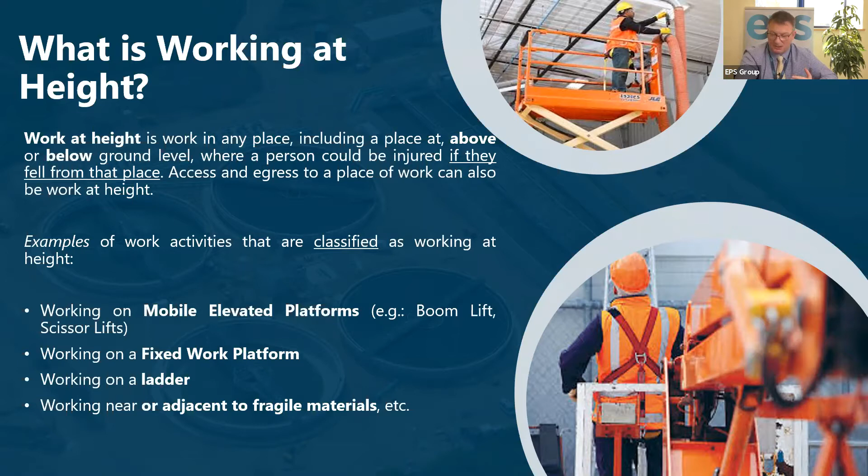Examples of work activities classified as working at height are working on mobile elevated platforms such as boom lifts or scissor lifts, working on a fixed work platform, working on a ladder, or working near or adjacent to fragile materials that could fall and break, creating another level where one didn't previously exist.

Falls are actually responsible for over 1,000 fatalities and 4,000 accidents across Europe every year. In 2019, 12 people died as a result of accidents on Irish construction sites, and 13 in the UK, with falls from height being the leading cause of fatalities. So falls shouldn't be underestimated.

I have a couple of personal experiences, not myself, but people I know who have been badly injured in what looked like relatively small falls, but they were actually very badly injured. So complacency is a constant threat, and we need to try to overcome that complacency and always be aware that working at height, or making your way to working at height, poses a risk.

Obviously ladders and step ladders are tools we use very frequently, but they should only be used where the work is of very short duration and the risk will be considered low.

The task should be light. You should be able to maintain 3 points of contact - that's 2 feet and 1 hand, or 2 hands and 1 foot, at any one time on the ladder. A handhold should be available, and the work should not involve carrying anything heavy or awkward.

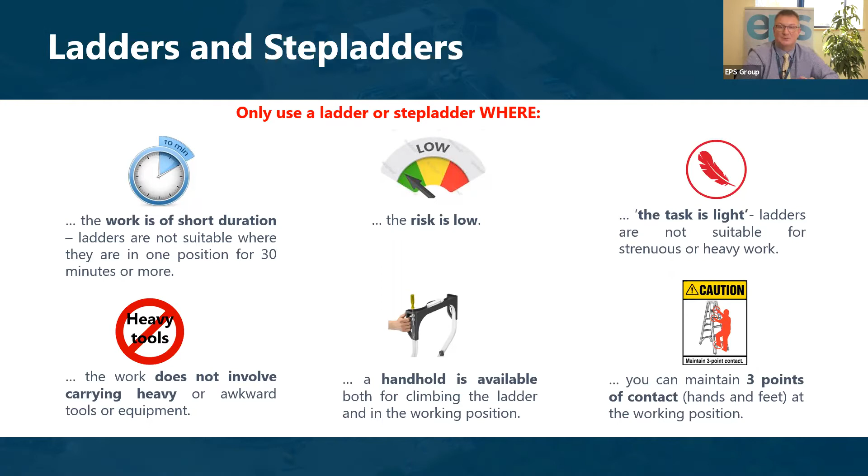Following on there with step ladders, some do's and don'ts. Ladder rules: we should always face the ladder when ascending or descending, and always maintain 3 points of contact. The top of the ladder should not be used as a step, and a ladder should never be moved, shifted, or extended while occupied.

You would have thought that was obvious, but there have been instances where that wasn't the case. We should never carry an object or load that would cause you to lose your balance. We shouldn't overreach. We shouldn't carry out work which causes sideways loading. We shouldn't work on the top 3 rungs.

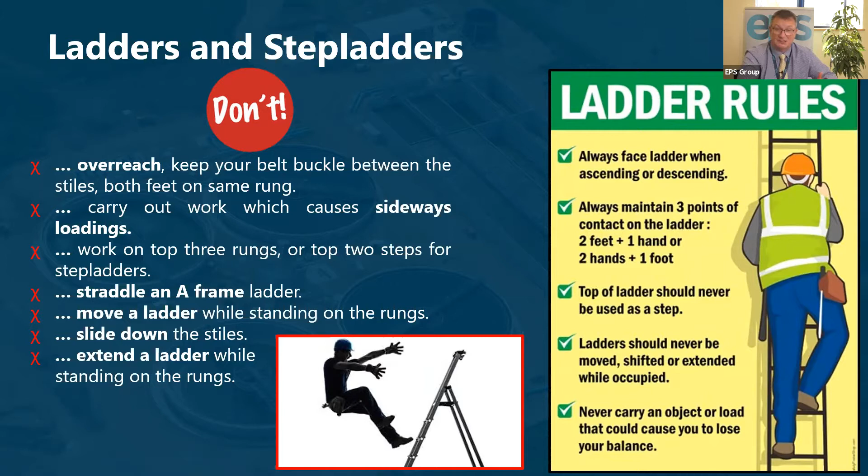We shouldn't straddle an A-frame, move a ladder, slide down the stiles, or extend the ladder while standing on the rungs. From a visual point of view, we should tie near the base of the ladder, attempt to tie it halfway, and we definitely need to tie the ladder at the top.

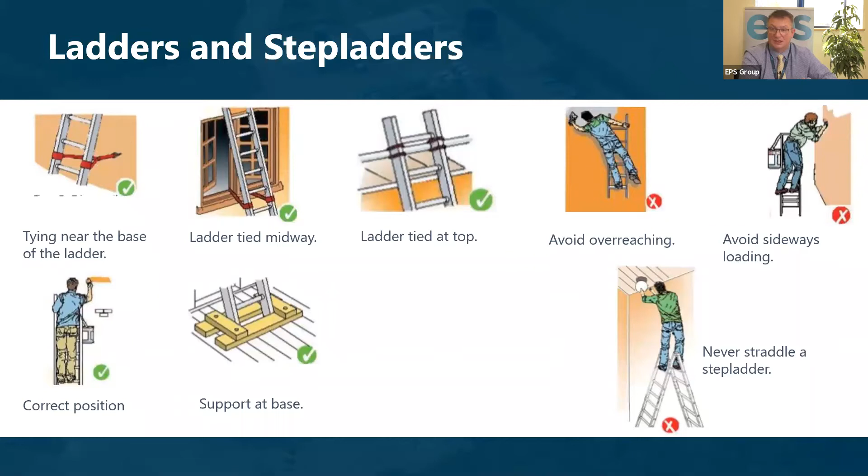We should take a correct position on the ladder, support it at the base, avoid overreaching and avoid sideways loading, and we should never straddle both sides of the step ladder.

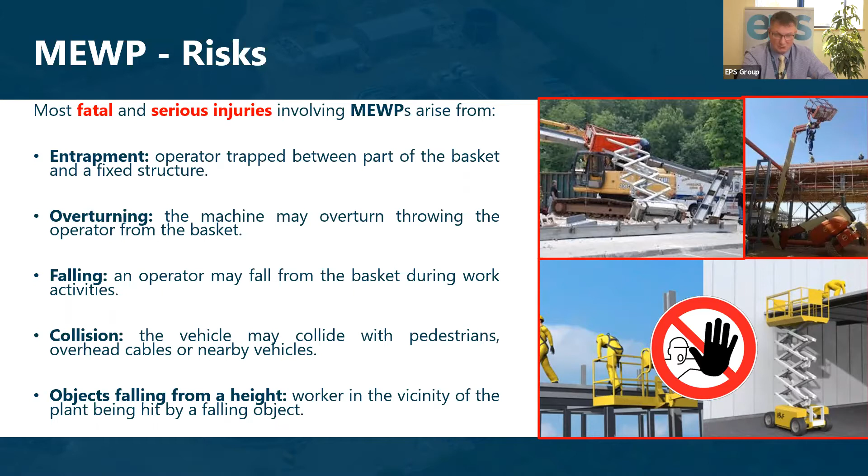Apart from ladders, we also use mobile elevated working platforms. The serious injuries that could arise from using this type of equipment are entrapment, where the operator becomes trapped between the basket and the fixed structure; the possibility of overturning, where the machine overturns and throws the operator from it; the operator falling from the basket; collision while moving the platform; and something easily forgotten, objects falling from a height, which could hit workers in the vicinity of the elevated plant.

When using mobile platforms, we should only select the right one for the task, and those platforms can only be used by a certified, trained operator. We should generate risk assessments and method statements for the associated work, and more importantly, develop them and follow them rigidly.

Before we start the work, we should perform pre-operational checks. We should use the correct PPE, which in this case is personal fall arrest systems. We should assess the position and stability of the platform and never exceed the rated load. We should also check that any maintenance dates for the equipment are within date.

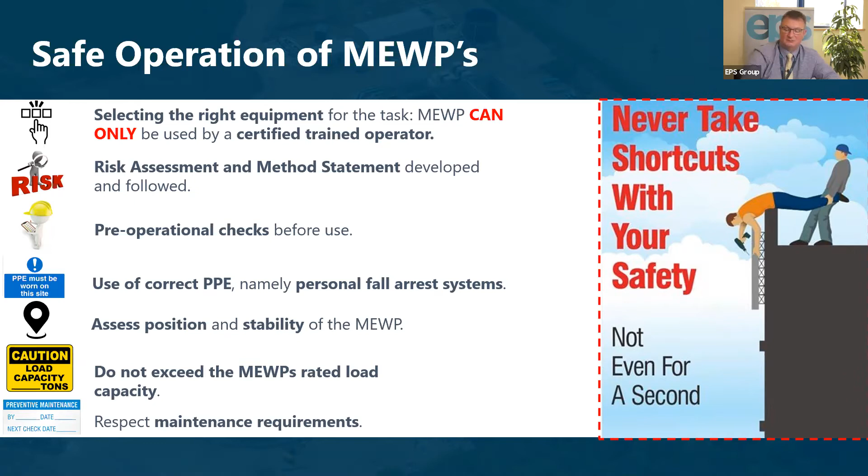When using fall protection, there is a hierarchy. The first step is to avoid it if we could, or use tools that avoid the use of any elevated platform. The second level is a physical barrier, like guardrails around unprotected edges. The third is to use PPE to restrain the worker from accessing the point where the fall could occur.

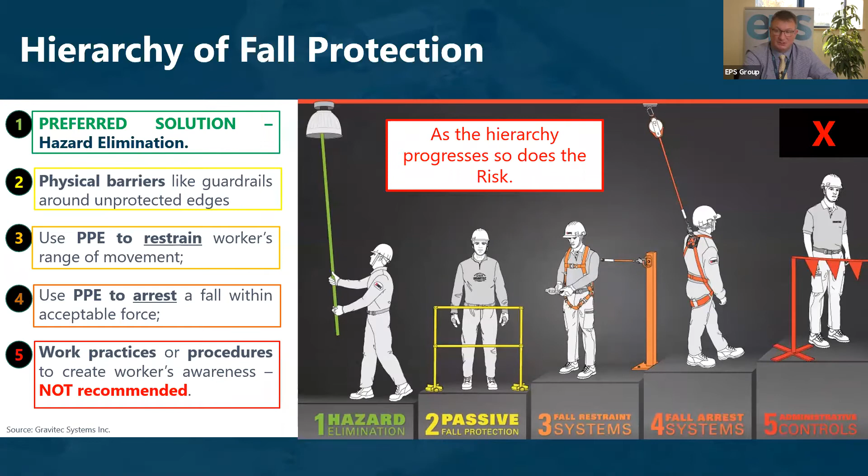After that, we would use PPE to arrest a fall should it occur. The fifth, and I suppose the least desirable, is work practices or procedures to create the worker's awareness, where there isn't much actual intervention from equipment or the workplace itself—it's just increasing awareness, and that is the least desirable.

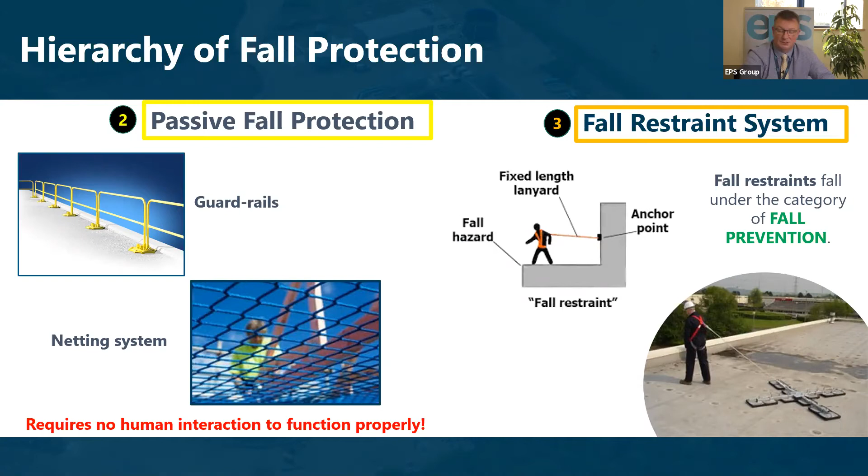Within that hierarchy of fall protection, number two is passive fall protection, like guardrails or netting—equipment that's there to intervene and prevent a fall, but we don't actually interact with it. The third is the fall restraint system, where there's an anchor point and a fixed-length lanyard which prevents the worker from accessing the point where the fall could occur. Number four is the fall arrest systems.

The fall arrest systems are meant to break the effect of the fall. The fall could occur, but this is to stop it before you hit the surface, and it consists of three points: the anchor point, the harness on the worker, and the connection, usually a shock-absorbing lanyard. The anchor point needs to be well assessed so it can take the forces that could come into play if a fall occurred.

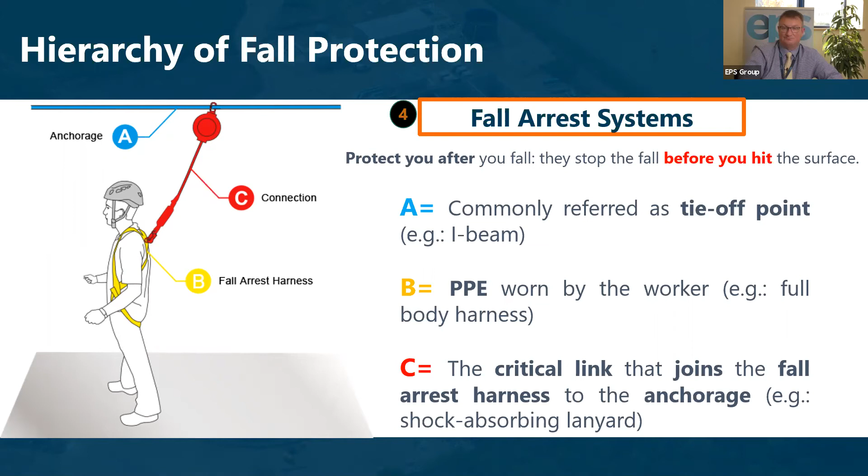The use of fall protection or fall arrest systems doesn't in itself eliminate all risks. There is a risk of injury from the fall protection itself: if the fall occurs and the staff member is suspended using the harness, pressures are exerted on the body from the harness, which could result in oxygen deprivation to the brain, a drop in blood returning to the heart, and compression of the femoral veins, causing blood to pool in the victim's legs.

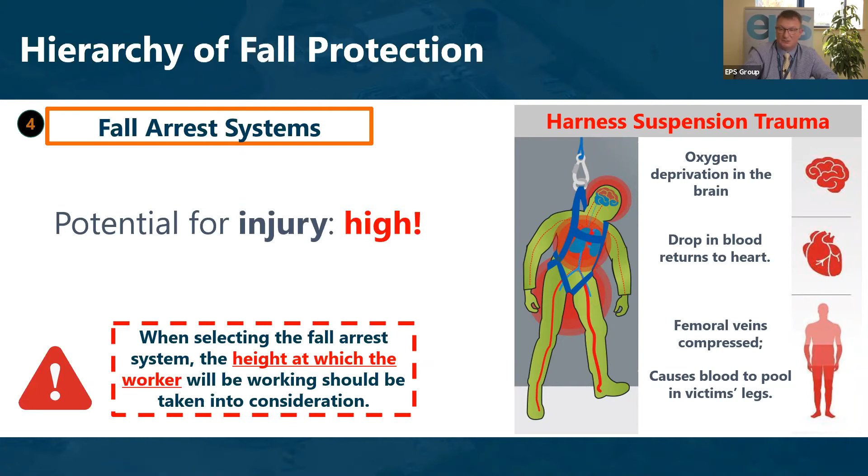As part of the whole risk assessment and method statement, there would have to be a method or system of recovering the person after the fall has occurred so that they aren't suspended in that position for too long a period.

With the lanyards we spoke of, you need to use the correct one, considering the maximum weight and length. We should always use locking screw gate carabiners and ensure both ends are locked. If unsure, consult your safety officer for the correct lanyard.

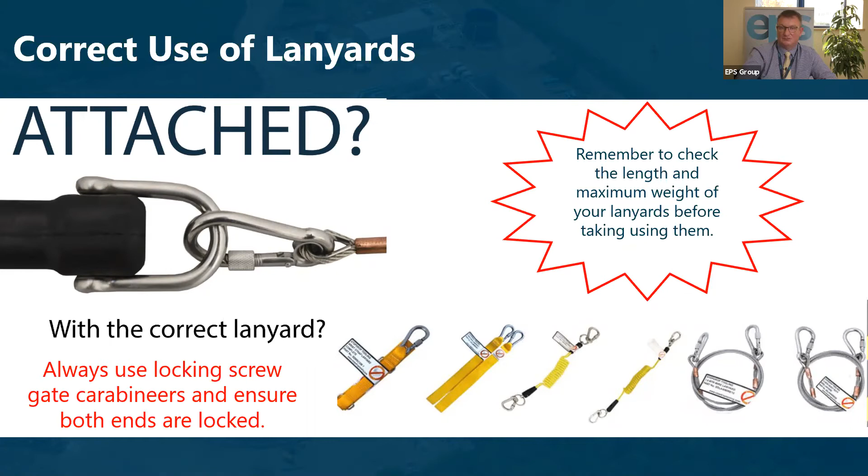We made reference to it previously, but falling objects is a serious risk when working at height. It's not so much about the platform or the person operating it, but objects falling from that, which poses a significant risk.

We should store as much as we can at ground level, ensure materials and work tools are secure, and any materials we need to bring with us are stored well back from the edges.

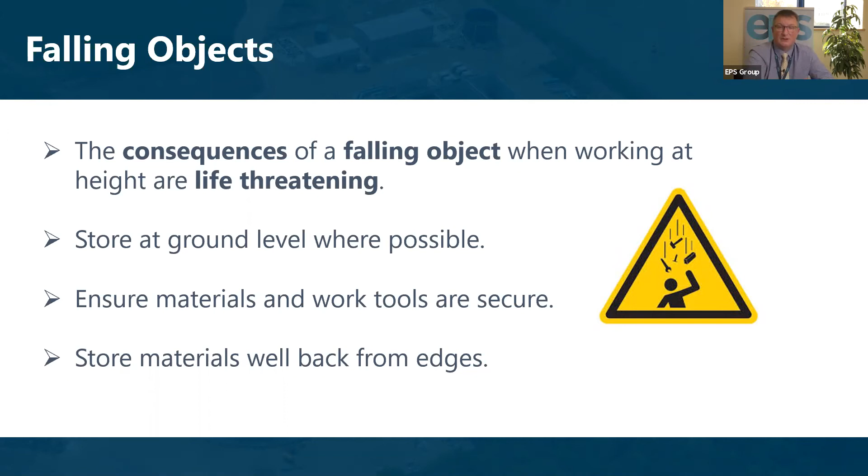We should always remember the principal goal is avoiding working at height wherever possible, and where we must, the work must be planned, supervised, and safe. We need to prepare a written risk assessment and follow that risk assessment and the planned method of work.

We should use equipment that protects the largest number of people, and never forget that work platforms must have top and intermediate handrails and toe boards. We should always protect all edges and openings where a fall could occur.

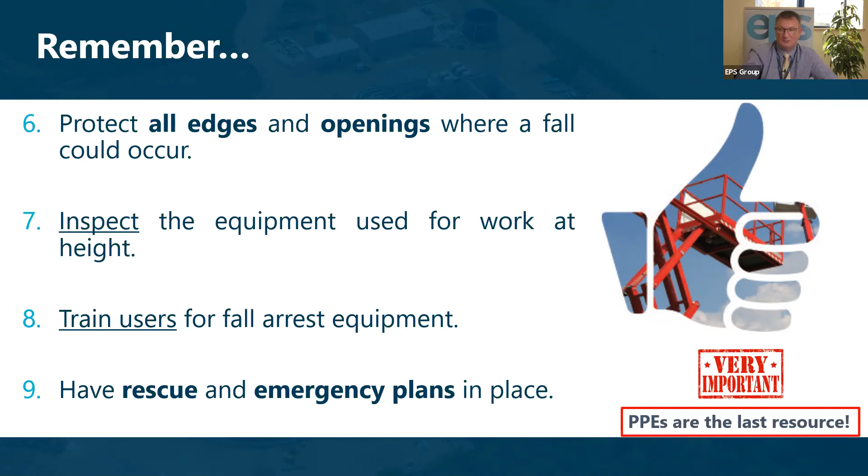We should inspect equipment for any maintenance requirements or dates that work or materials need to be checked within. We need to train users of fall arrest equipment, and have rescue and emergency plans in place for the reasons discussed earlier.

In summary, we should always look to see whether we can avoid working at height, and if not, plan the work with adequate access, egress, edge protection, adequate plant, PPE, and suitable training.

Any work at height always requires guardrails, intermediate guards and toe boards fitted, or another appropriate control. Where impractical to fit those, personal suspension equipment and fall arrest equipment must be utilized as required.

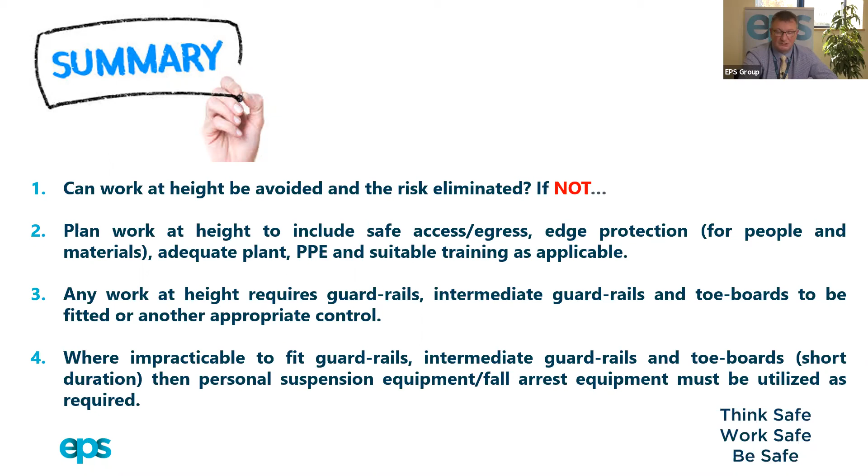We're just going to look through a short video now.

Not taking the right precautions when working at height could put you, your colleagues, subcontractors, site visitors or the general public at risk. Accidents can happen due to falling from a height, falling objects or equipment collapsing.

Evaluate the work to be done. Can it be done from the ground? If you must work at height, identify potential hazards and prepare yourself.

Wear your safety helmet, footwear, gloves, and most importantly your harness. Use approved and certified equipment only. Consider the weather conditions and the impact this may have on working safely at height.

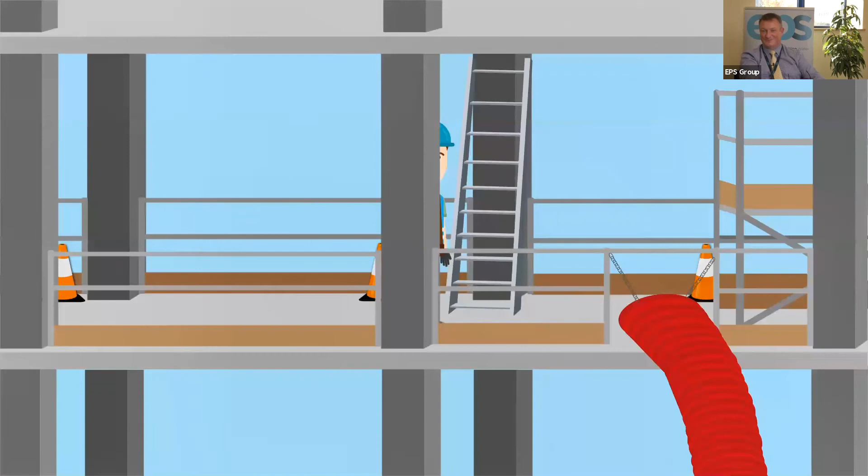If debris is likely to be falling, then chutes, fans or full enclosures should be used. All work at height should be supervised and carried out by a competent person.

If you're simply using a ladder, make sure someone is securing it at the base. No matter where you work, remember: think safe, work safe, be safe. And when it comes to working at height, it's not the falling that hurts, it's the landing.

Okay, so that's it really for today.